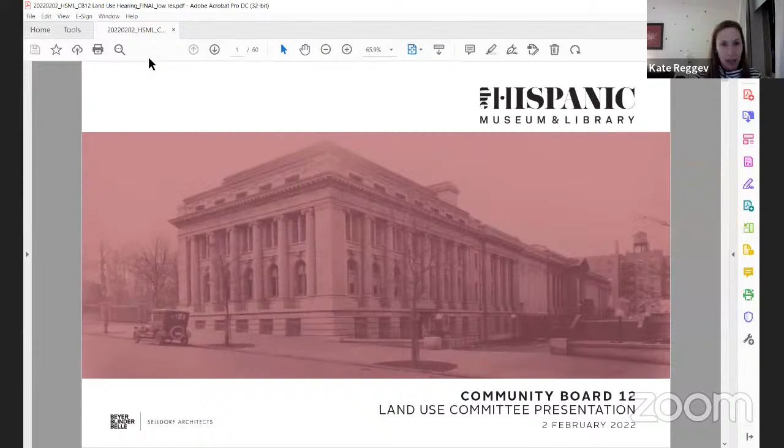And Kate, can we share the screen? Wayne? Yes, okay, tell me when. So Margaret, I'm sharing, just let me know. Can everyone see it? We can see it, okay. All right, and let me get into presentation mode, and there we go.

Excellent, okay, so we have a lot to cover this evening, but I just wanted to tell you that our focus tonight is to present our current plans for the Landmark Preservation Commission.

As many of you know, the Hispanic Society is located on Audubon Terrace, which is designated as a New York City landmark, and thus anything on the exterior of the building must be approved by landmarks. So we are coming to you this evening to present our plans in advance of presenting to landmarks, and that's why we're here.

But I just thought I would mention a few other things that are happening and what our objectives are. So as many of you know, this is the Audubon Terrace.

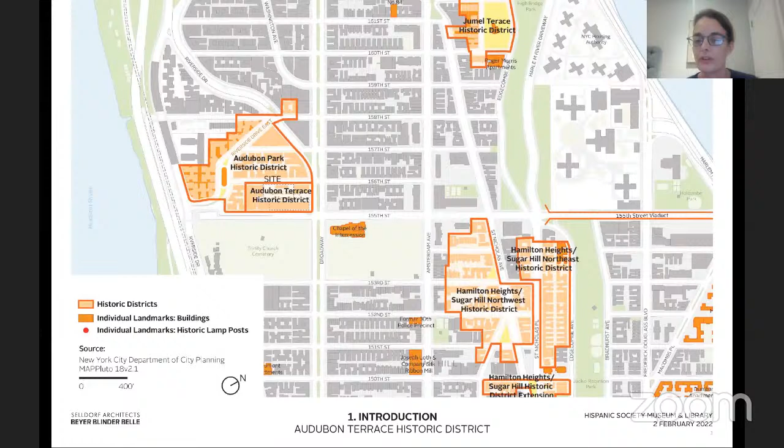This is the historic district. As you can see, there's the Audubon Park Historic District. The Hispanic Society is located on Audubon Terrace, on the south side on 155th and Broadway, and it also runs into the terrace, and we occupy the center building on the north side of Audubon Terrace. So just to orient everybody.

In previous meetings, I have presented early stages of our master plan, which we revisited with a new design team in 2018, completed in 2019. I'm really excited to be working on the execution of some of these plans. We are moving in phases, because we have a very ambitious project to address all of our buildings, the entire campus of the Hispanic Society.

You can see in this slide, outlined with this lovely red dotted line, the campus belonging to the Hispanic Society. So again, we're on Broadway and 155th Street, and on the north side is 156th Street. So that orients us all.

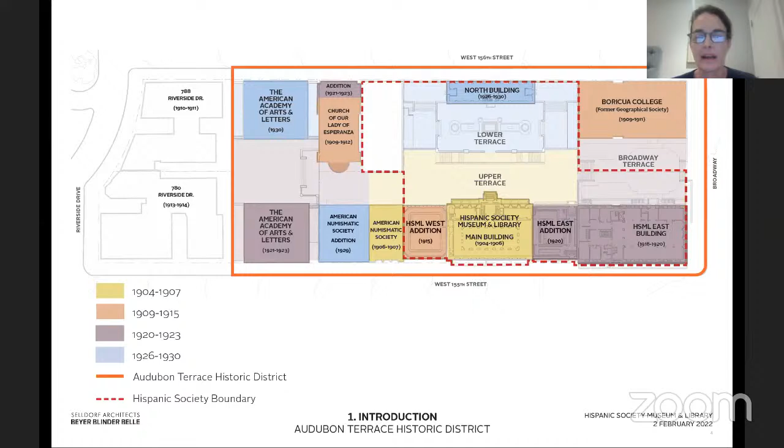Okay, and this is kind of a bird's eye view. There are two main objectives here that we're trying to achieve: one is having universal accessibility to our buildings, and also to reopen.

We have been closed since we redid and replaced the roof of the main building and restored the facades. We had hoped to be earlier in the stage of our renovation of the East Building, but we're getting to it.

What we did do last summer is a temporary renovation of the ground floor of the East Building so we could do exhibitions in that space.

But of course, that exhibition space is located in the East Building, and when we renovate that building, we will have to close it. So what we would like to do is reopen the main court and the Sorolla Gallery, and allow it to be fully accessible. So what we're really looking to show you today, and Kate's going to show it to you,

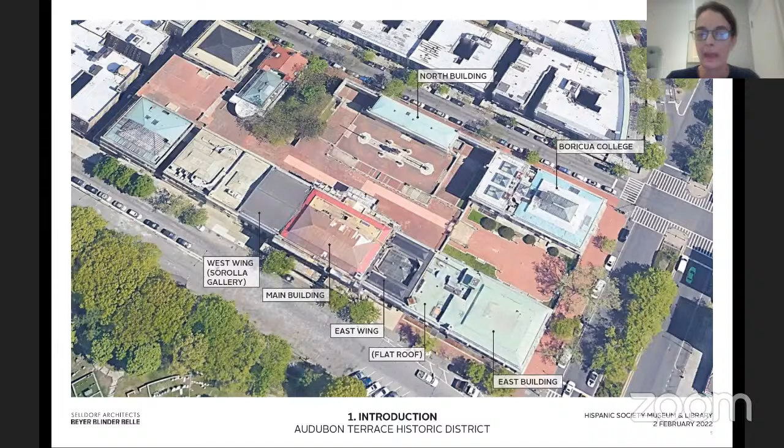is an accessible route. Some aspects are temporary until we can do the full renovation of the terrace, but we really are eager to open up the Sorolla Gallery and the main court and allow everybody to enter into that building. Let's see, what else do we have, Kate?

So this is, again, the terrace. Now, just a little bit of history for those of you who have not been to the Hispanic Society. The Hispanic Society's first building, the main building you see in yellow, was started in 1904, finished in 1906, and opened in 1908.

Huntington, our founder, had this idea of a cultural campus, bringing in other cultural institutions. He was also building the collection while expanding the building and finding space to put everything. So we actually purchased the building on the corner, identified as the East Building on 155th and Broadway, which was the former Museum of the American Indian building. We purchased that building in 1996 to expand our space, which also gives us direct access to Broadway.

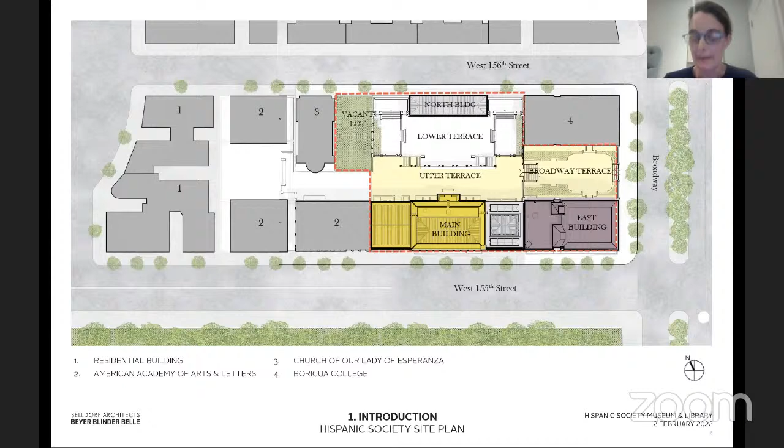Let's see, what am I missing? I think it's the next slide. But there are a series of terraces, which, as lovely as they are, are not accessible. So we are really eager to open them up and allow everyone to enjoy them.

So Kate is going to show you in a moment, but really that's the idea. The other project we're looking to address is the actual renovation of the East Building. We're working in phases, starting with the envelope, like we've always done with our projects. We're replacing the roof—you can see this old photograph from 1919 showing the original skylight, which was covered up by previous tenants. We're looking to bring that skylight back and create a glorious conservation studio on the 4th floor of the East Building, with a new copper roof.

As many of you know, there's no air conditioning in these buildings, so we're looking to fully air condition the spaces, in keeping with museum standards. That equipment has to go somewhere, so Kate is going to present the plan for where to put it—it will be located on the flat roof of the East Building, which she'll show you.

Another aspect of the plan is to put in a new freight elevator. It will be a service elevator—both a larger elevator for artwork and a passenger elevator, ADA accessible. So there will be a second elevator in addition to the one we have now.

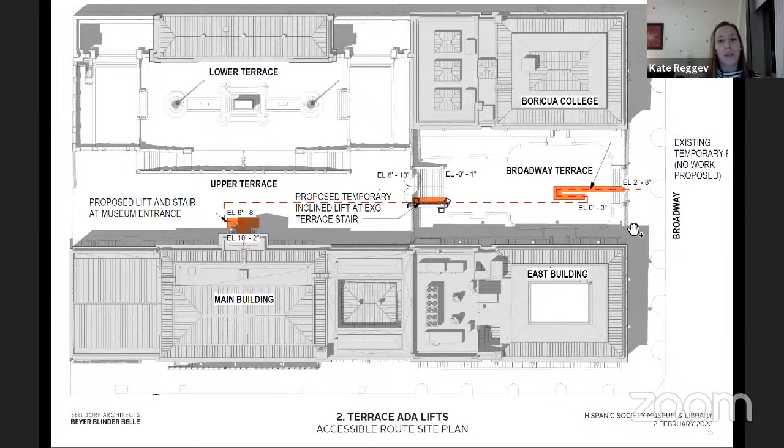So in section, we have Broadway over here. There's that temporary ramp, no work proposed. And then to move up these existing stairs, we're proposing what's called an incline platform lift. I'll show you more detail about that. And then finally, to get up to this last section here, to get into the main building, we're proposing building out a platform, a new set of temporary stairs, and then a vertical lift.

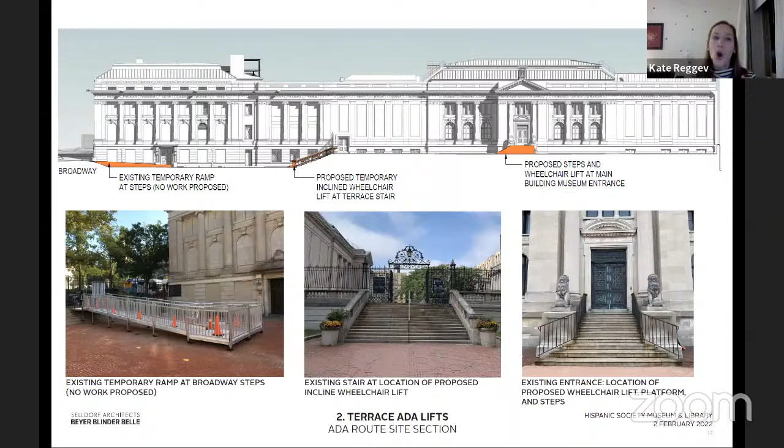Now, I'm saying all of this is temporary because we're not anticipating it will be there for just a month or two. We really are thinking temporary in terms of a 5 to 10 year timeline, so we want this space to continue to be accessible as the Hispanic Society continues work on its master plan and opening buildings over the next several years.

So looking first at this flight of stairs that go from the Broadway terrace to the upper terrace, a couple of notes about the existing conditions. The steps themselves are granite, solid granite, and then they're surrounded on either side by a limestone balustrade. And then at the top, we have a wrought iron fence and gate.

This gate is actually not original. We have some historic photos that pinpoint its installation to the 1950s.

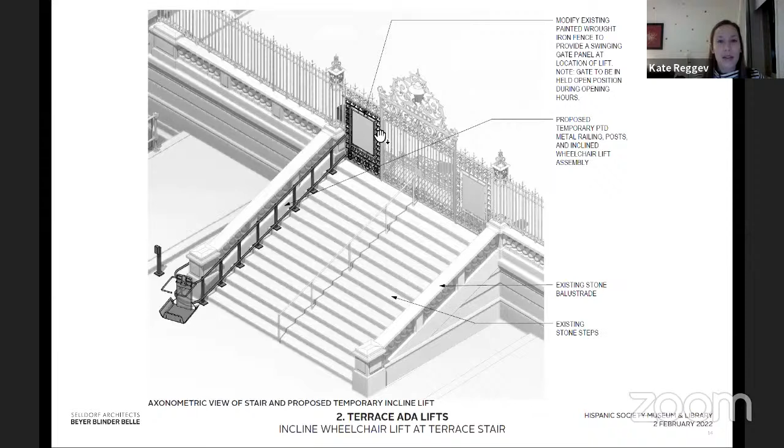And what we are proposing to do is install a platform lift that will take you from the bottom of the stairs up and then would open one of these wrought iron metal panels. The current configuration of the fence is that there's two swinging gates located in the center, and on either end are fixed panels.

Our proposal modifies one of the fixed panels so that it becomes almost like a swinging door that would manually open by whoever is also opening these gates when the museum is open, so that someone could roll onto a lift down here.

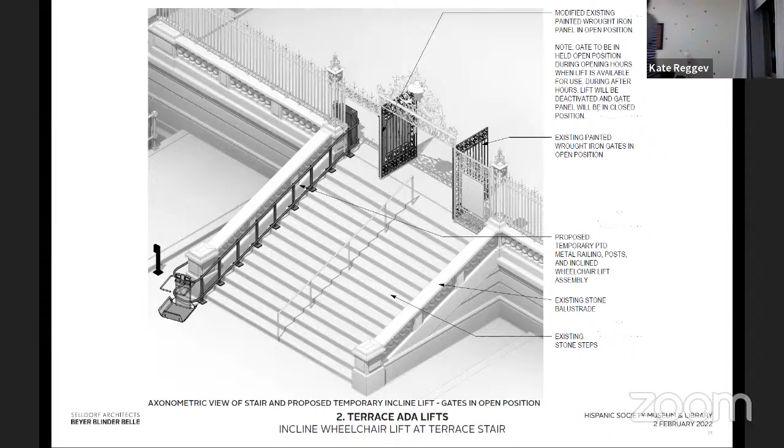So you roll onto the lift at the bottom, the lift moves you up the stairs, and then at the top you are able to roll off and the panel of the gate is held open. The call button is here at the bottom, and there's a similar freestanding call button at the top.

So this is the existing condition, and this is how we propose it would be. You can see the lift, when it's not being used, is tucked off to the left there. Actually when it's not in use, that platform is flipped up vertically.

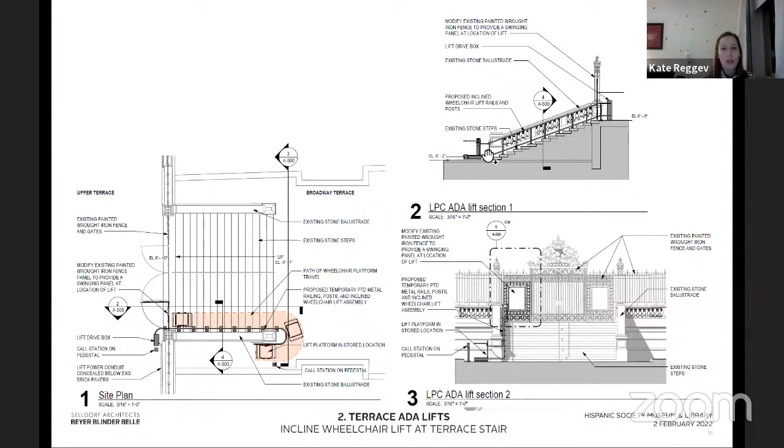So a little bit more detail, the path of travel is in the bottom left here. If you follow this red or orange path, you roll onto the lift, and then you are swung up and around and dropped off at the top. The lift itself is supported on every other step by these posts that go down onto the granite step, and then two horizontal rails.

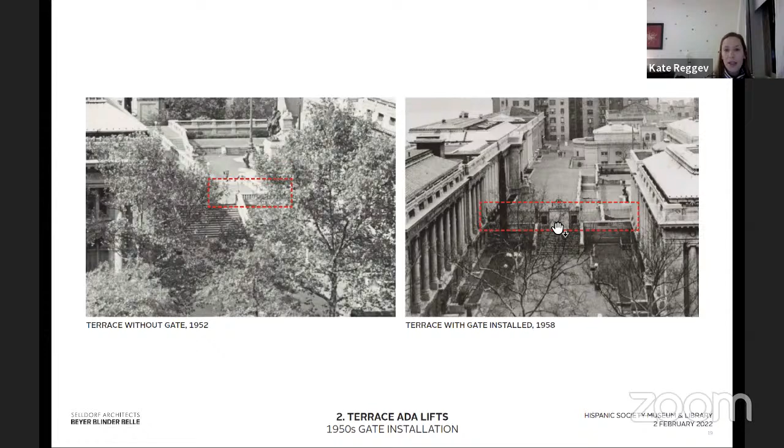This is just demonstrating that in 1952 that original gate was not there, so we know it's not original. And in 1958, we do see it in place. So the modifications to that non-original grille, we can talk more about the details of those.

In short, what we're anticipating doing is leaving this top panel so that there's continuity that remains at this location. And this fixed panel, part of it already is a separate panel. We do anticipate needing to add a horizontal member at the top and another vertical member on this left side so that it can transform into its own individually swinging gate.

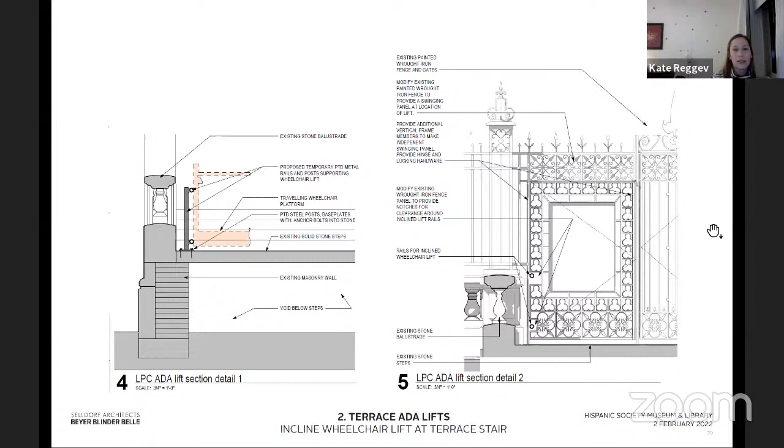Then from the top of this, where this lift would drop you off is what you see here on the left. Then you're at this what we call the upper terrace, and you are ready to move forward towards the main entry. But as we've mentioned earlier, the main entry itself has a flight of stairs that you need to go up in order to get inside.

Similar to the other steps, they're granite steps. They have a non-original wrought iron handrail, and then they lead you to the bronze doors here.

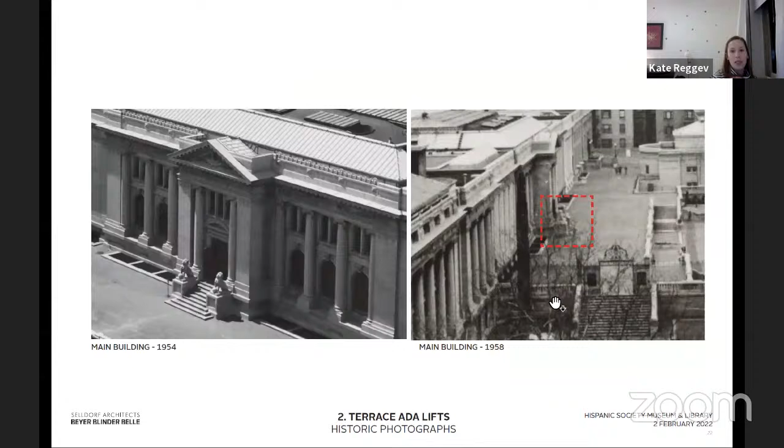One issue we have here is that there's virtually no stair landing at the top when you reach the top of the stairs. So in order to make this ADA accessible, we are proposing to create our own platform, extending out a new metal platform, and also having a new set of temporary stairs that take you from the level of the upper terrace up to the platform, which is at the same height as you enter the building.

And then on the other stair, we have an inclined platform lift. On this one, we have just a vertical lift. The rise here is shorter, about a 5 foot height difference, so this kind of vertical lift is actually pretty convenient for that.

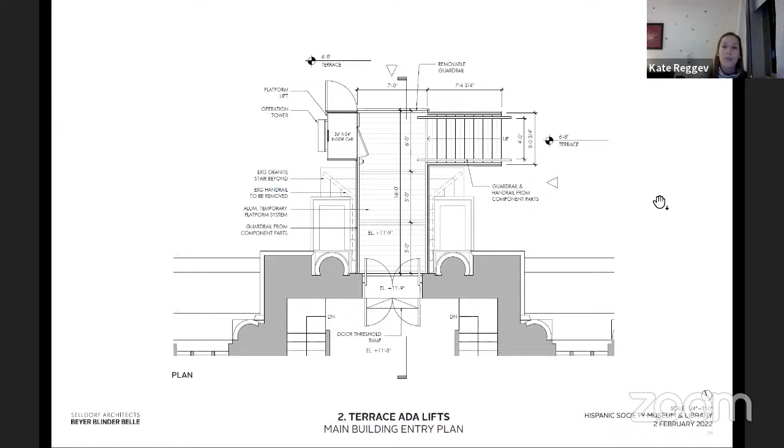What we plan on cladding the underside of the platform with would be painted metal aluminum panels. We are trying to pick up some of the colors and finishes that we see elsewhere in the building. There are some bronze doors here, and the windows are also bronze, so we want to continue that materiality here.

And so we would paint the whole thing, the panels and then the handrails and guardrail as well. All of that would be a dark powder coated painted aluminum.

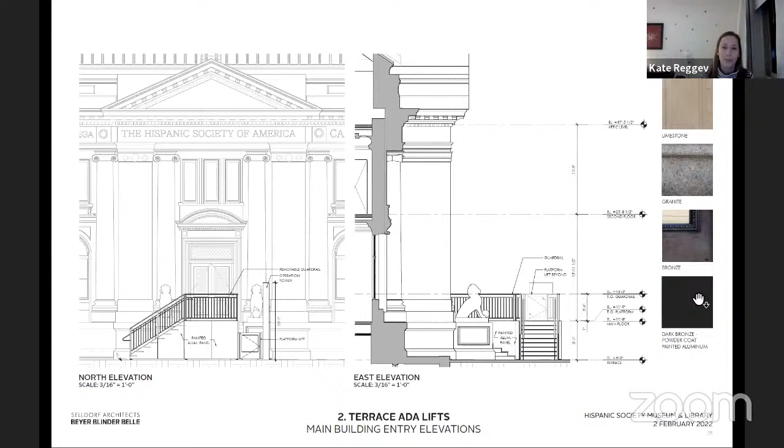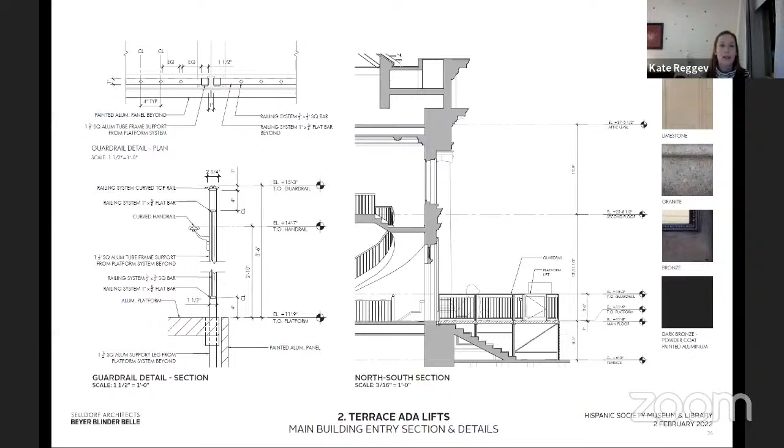A little bit of detail about some of the handrails: they also would all be ADA compliant. One quick note, one section of the railing would actually be removable so that the Hispanic Society can also use this as a means to transport art into the main building.

In sum, on the left is what we're looking at for that incline platform lift from the Broadway terrace to the upper terrace, and we think that would be black. It would have these freestanding call stations that I mentioned earlier, whereas the vertical lift would be a dark bronze powder coated aluminum, with a wall mounted call station right next to where you would enter.

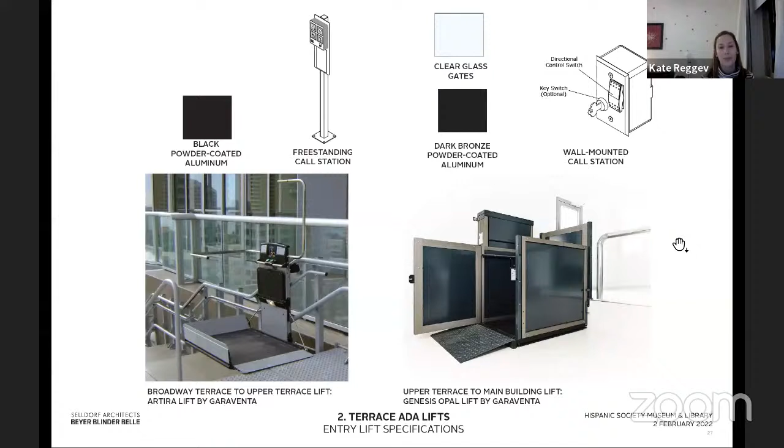So that's kind of addressing accessibility on the terrace. We also have a project where we're looking at the east building that Margaret had talked about earlier. We're trying to make that no longer primarily a storage space.

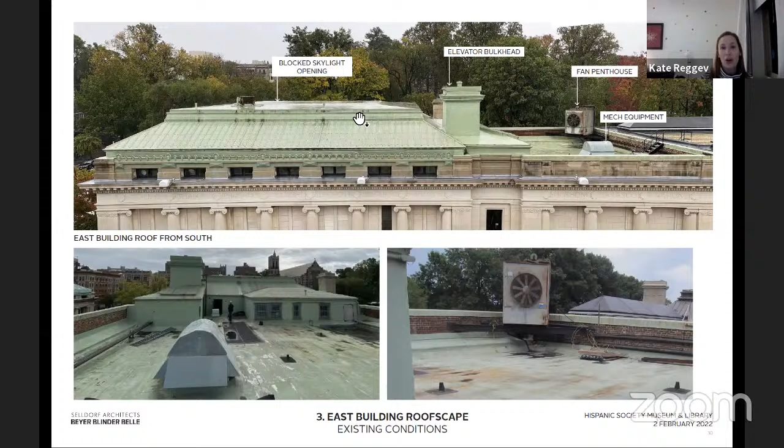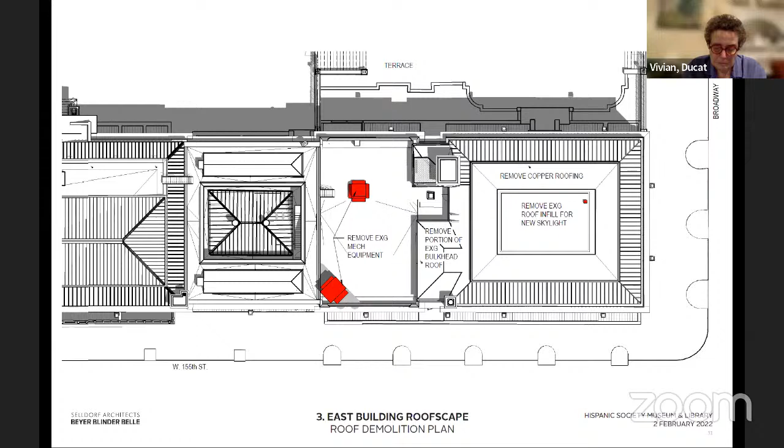A new elevator bulkhead. As Margaret mentioned, there is an existing elevator for the building, but it is sized for a passenger. It is not sized for someone in a wheelchair, and it also is too small for artwork. I should mention that elevator is original to 1919. So the building really needs an appropriately sized and accessible elevator.

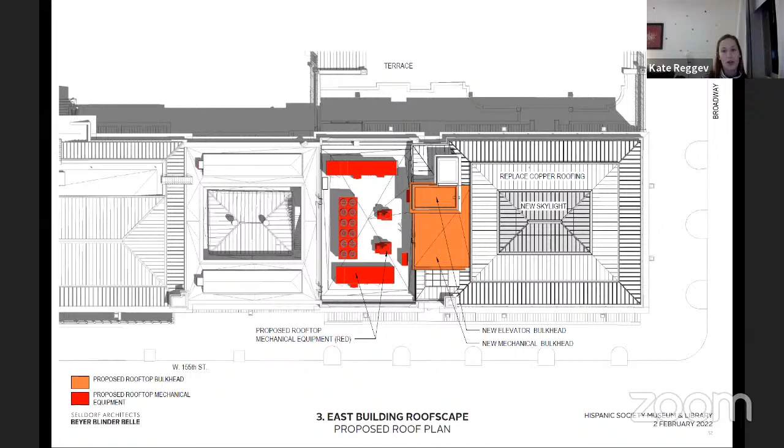And then to accommodate that, there's a low roof just south of it. That's also part of a new bulkhead.

Looking axonometrically at this building, kind of a bird's eye view, you can see these two existing pieces of equipment. The one on the south is really quite visible - it's really high up, quite large. And we are proposing to remove both of these.

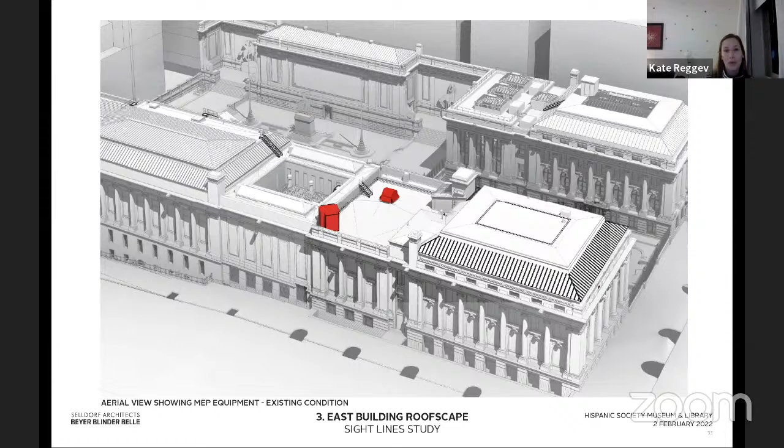Going back briefly to the elevator bulkhead and some of the materials: we are going to keep the existing elevator bulkhead. We will repaint it something more similar to its original color, which likely matched the existing limestone facade. We would continue that materiality and detailing for the new elevator bulkhead, which would match it in height, and also have a matching copper cornice around the entire bulkhead. Both would be painted stucco, and that stucco color would match the limestone.

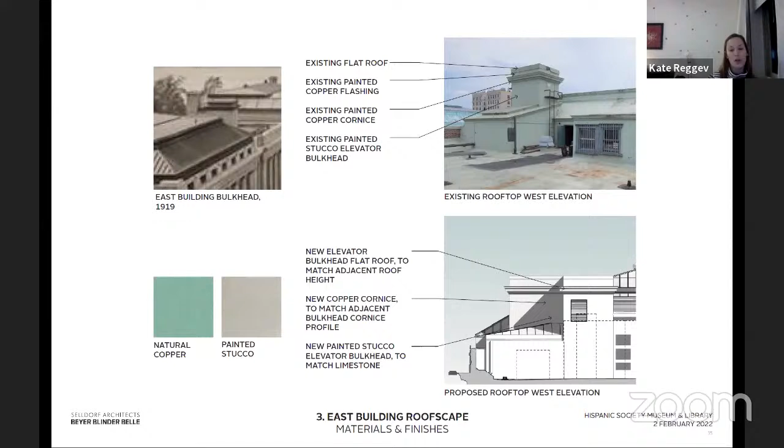We also are located on the north side of Trinity Cemetery, which has a lot of greenery and a slope, which means you really cannot see a lot of this equipment from far away.

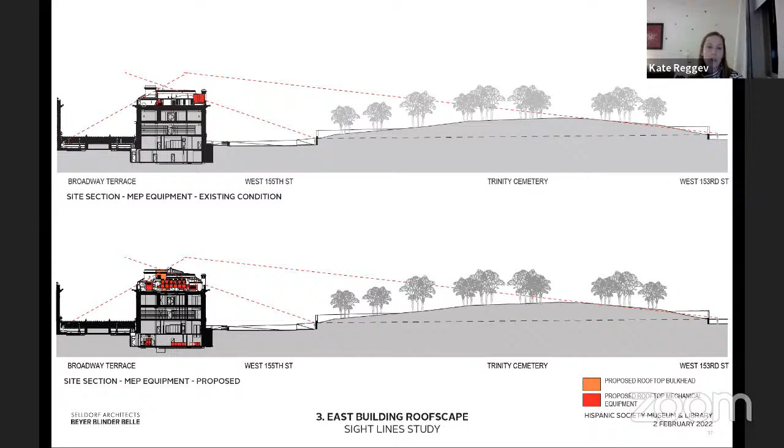So we will go through some sightline studies in just a second, looking at various vantage points from around the block.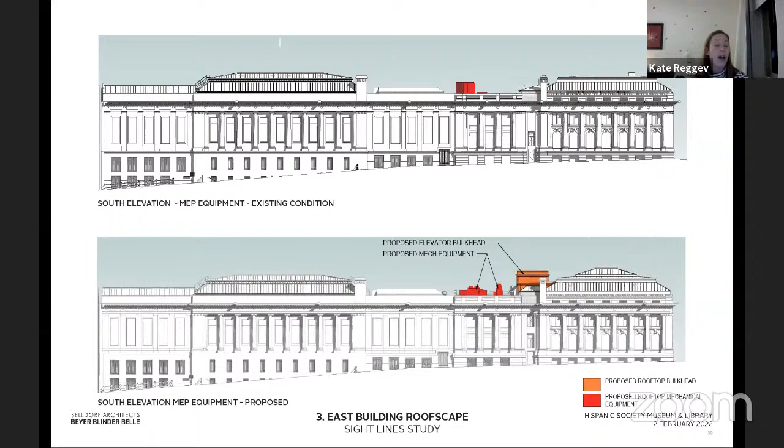Now I'm going to walk you through a couple of different photos and sightline studies. What you'll consistently see on the leftmost image is the existing condition. In the middle is the condition of a mock-up that we completed recently. And on the right is our rendering of what it would ultimately look like.

So this is if you are standing within the terrace, not technically within the public way, but still within the terrace - if you are all the way on the west side of Audubon Terrace, looking back at the east building.

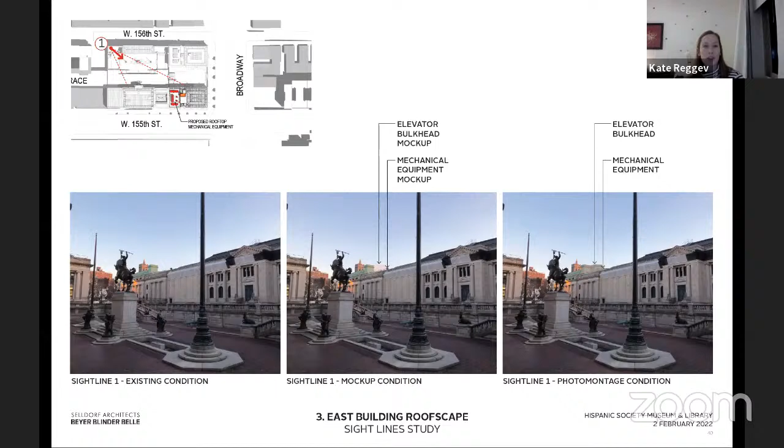In the center is the existing elevator bulkhead, and in orange you can see our proposed elevator mock-up. Just to the right of it, very low, is the mock-up for our mechanical equipment. On the right is our photo montage with the materials we would propose. That elevator bulkhead, again, is stucco, but it is the color of limestone, and it matches the existing elevator bulkhead. This would be the view if you are still within Audubon Terrace, but a little bit further to the west.

The mechanical equipment would be kind of a gray tone, but really for the most part, it's really quite hard to see. It's really low. This would be if you are standing at Broadway and the corner of 156th Street.

This is kind of catty corner from the Hispanic Society. On the left, the existing condition. In the middle, what you can see that little bit in orange is the mechanical equipment mock-up. On the right would be what you'd see from a distance, the photo montage. From this view, you cannot see the proposed elevator bulkhead.

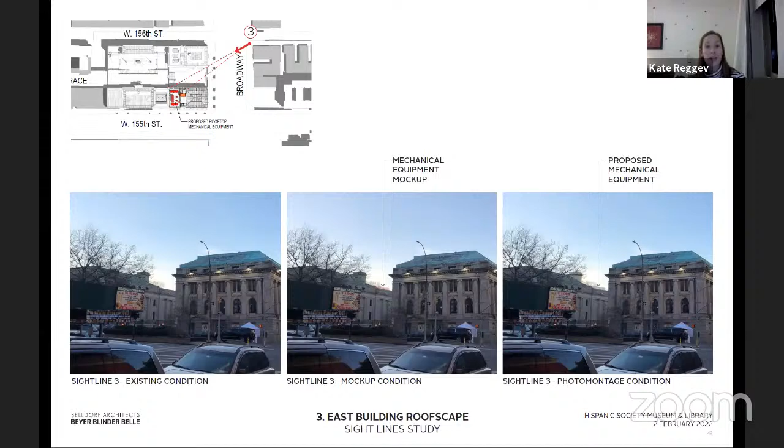Moving further south, if you're standing on the southeast corner of Broadway and 155th Street, you can see very clearly from a distance that existing mechanical equipment. From this view, you do not see the new elevator bulkhead or any of the mechanical equipment we're proposing. Neither the mock-ups or the bulkheads would be visible from this location.

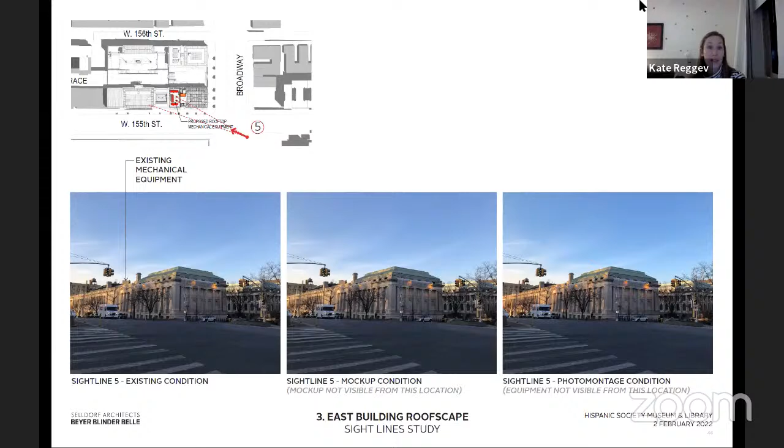Moving slightly further south, now you're mid-block on Broadway between 154th and 155th. You're far enough away that in the summertime the trees really block the majority of this, but in the wintertime you see a little sliver of the mechanical equipment, this tiny dot in orange. The mechanical equipment will be a gray metal finish.

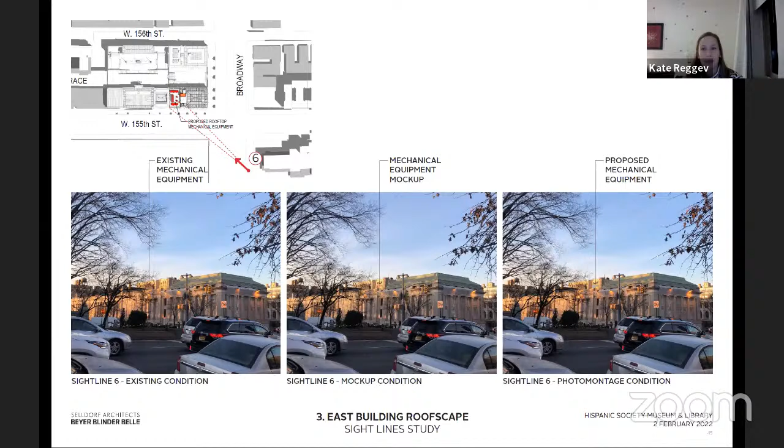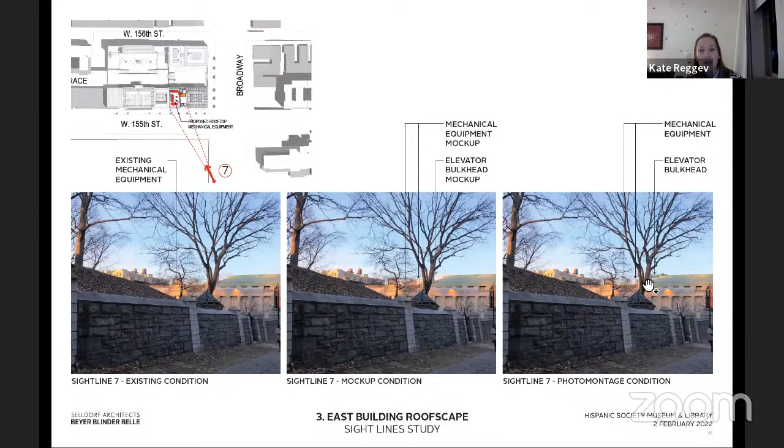If you're standing on the opposite side of the street, on the west side between 154th and 155th, you have the cemetery on your left. Through some of the trees, you are able to see ever so slightly this bit of orange for the mock-ups. On the right, you see a sliver of the new elevator bulkhead behind that tree, and a little bit of the mechanical equipment to the left of the tree.

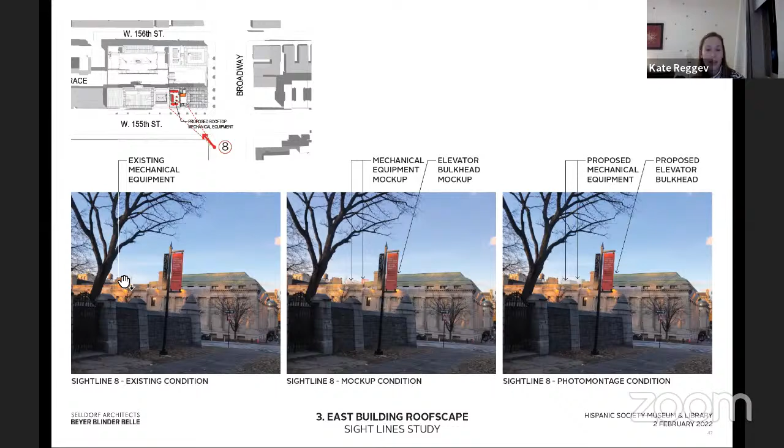Moving slightly closer, you do see again a little bit of the mechanical equipment and a sliver of the new elevator bulkhead. But I should note that in these locations, what's really dominant is the existing elevator and existing mechanical equipment. It's this kind of big chunky thing that you see in the left image.

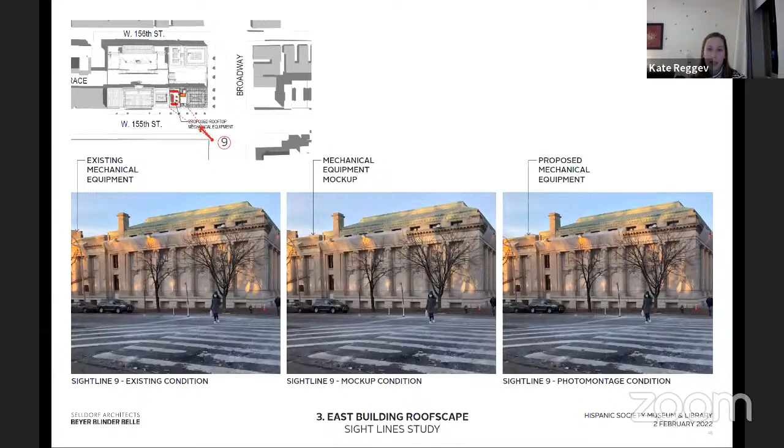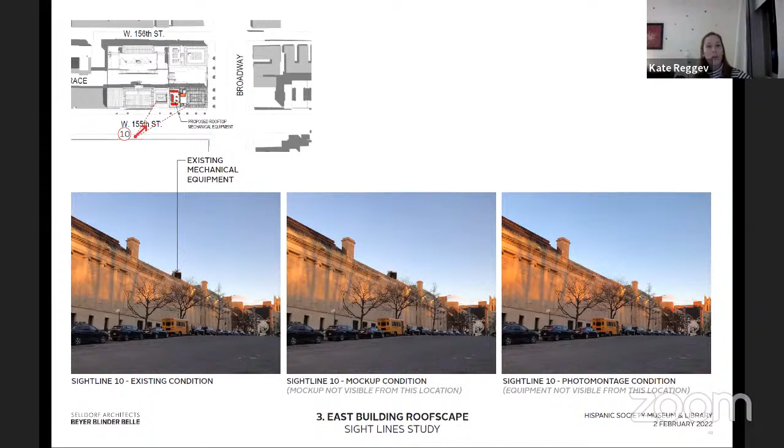Moving closer to the building, because of the elevation of the building, as you get closer you see less and less of the mechanical equipment and the mock-up, until finally you get to our last sightline study where you're further down the block and you do not see the mock-up or the equipment for the bulkhead or for the elevator. That's because at this point you're actually below, going downhill and looking up, so you don't see it.

Finally, as part of reopening and welcoming people back into the buildings and onto the terrace, we're looking at proposing some exterior signage. At the moment there really is very limited signage to the building—some existing banners attached to the fence on Broadway. We would like to do something more permanent that also has flexibility for changing out the banners when new exhibitions open.

On the south facade, we're proposing a single banner in this last bay. On the north elevation, we're proposing a symmetrical arrangement that emphasizes the building's existing symmetry—3 banners centered over the entry. On the east elevation, we are proposing a single banner in the southmost corner.

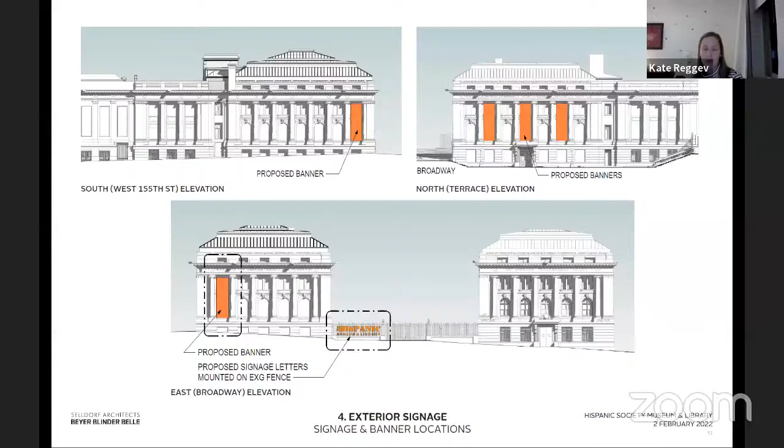And then on the fence itself, which I should note was installed in 2006, so it's not original and not historic, we are proposing to attach some kind of 3-dimensional signage. This would attach to the existing fence and would be a feature that's really visible and ready to be viewed by the public walking by—very pedestrian oriented.

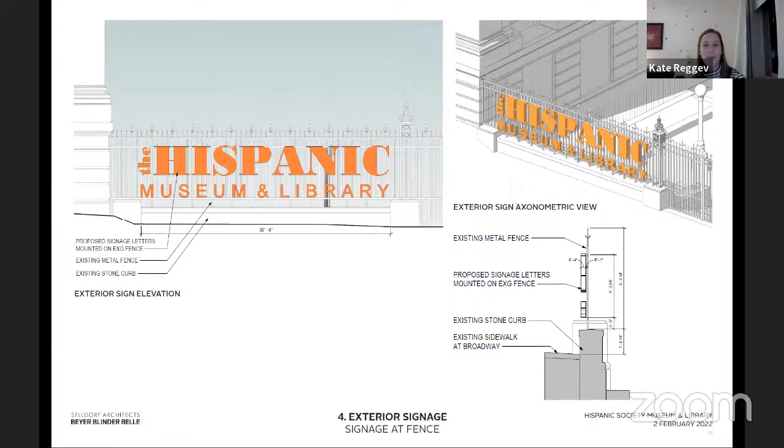In terms of how we would attach that, we took some inspiration from the Cooper Hewitt and how they attached their signage to their landmark fence. Rather than drilling into the fence, they bracketed onto it, so you really are touching that existing fence in the most minimal way possible.

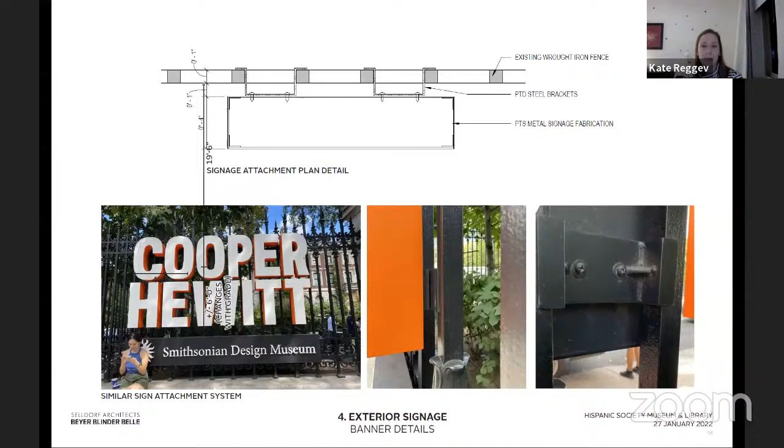For the banners, we are looking at a system similar to several other major museums in the city. It's almost like a rigging system that attaches at the bottom and top between these bays, and then this fabric banner is rigged up like a sail.

Thank you, Kate. I had two quick questions as you were doing the presentation. One is, do you plan or did you consider screening the HVAC equipment so that whatever is seen is a sort of intended designed element? And I noticed for the signage, you're referring to the Hispanic Museum and Library. Is there a conscious effort to rebrand the institution from the Hispanic Society of America to just the Hispanic Museum and Library?

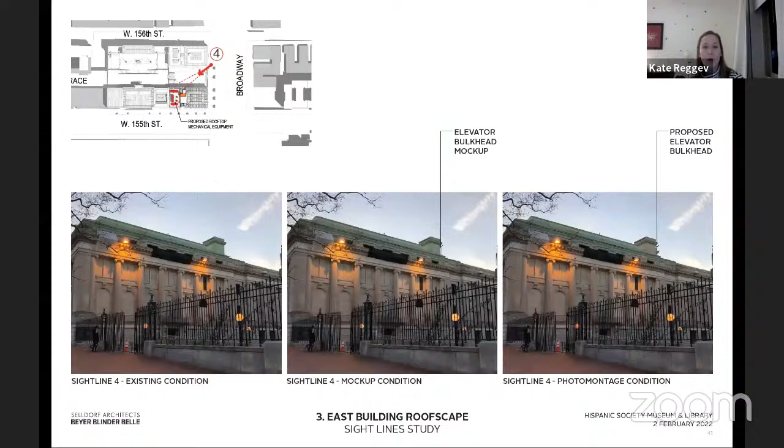Let me hop back and show you in section what we did. If we look here at the bottom, the mechanical equipment closest to the edge is the lowest equipment. And especially from the view from the south, that equipment is as low as we've made all of it possibly can be.

We're removing about 1.5 feet of fill at the roof, but because of the isolation and support required for this equipment, it really cannot be any lower. So if we were to install a screen, it would actually make it more visible than the equipment itself, just because of how low the equipment is.

And then Margaret, I'll let you discuss the name and logo. Thank you, Wayne, for that question, because it's a good one. We are and will always be the Hispanic Society of America, legally speaking, but because there's a misunderstanding of what we are as a museum and a library, we wanted to make that clear.

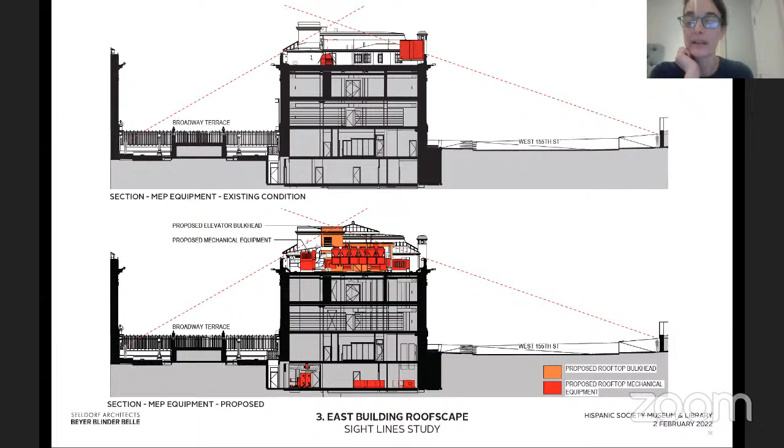So publicly on our website and our signage, we are the Hispanic Society Museum and Library. So it is a rebranding, similar to what the Morgan Library has done with their Morgan Library and Museum. So we are the Hispanic Society Museum and Library.

Really, the intent is that 'society,' I think for many people, sounds like a private club, which we are not. We're working hard to be more engaged with the wider community and be known as a museum and library. We're open, free to the public, and we want to invite people in. So we are the Hispanic Society, but we are a museum and library. That's the intent behind that.

And that happened several years ago. It's just that we don't have a sign, so no one knows. But if you go to our website, it's Hispanic Society Museum and Library.

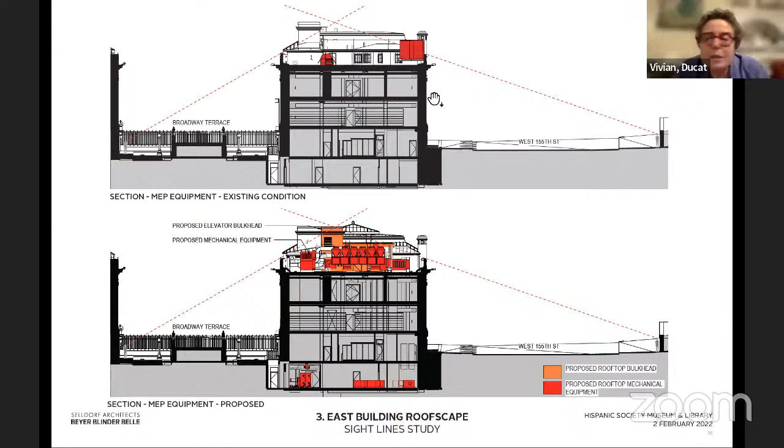Yes, thanks. Vivian, your hand is up. I was curious whether you've already started the work, because as in the picture I emailed you, Margaret, there's already sort of an orange structure. There's stuff going on the roof that I can see at my window.

Yeah, so part of the application process with landmarks is that they require you to do a mock-up of what it will look like, so that we could take these pictures for you and show you what it's going to look like. So it's for you and for landmarks, and also to photograph and document.

Of course, I have to say, just before we installed this, right before a storm, we've been concerned with some of the netting. I think we took it down because we didn't want it to hurt anyone, but it's been reinstalled. So it's not work, it's really a mock-up so that you could look at it and comment on what it will look like installed.

I don't know, Kate, if you want to speak to that. Yes, that's exactly what it is. You might also see that there's some netting around some of the elements of the cornice around the building, and that's related to ongoing maintenance and repair work that my firm is working on. We will be coordinating that with landmarks once work is being done. Right now, we're in the investigation phase of that.

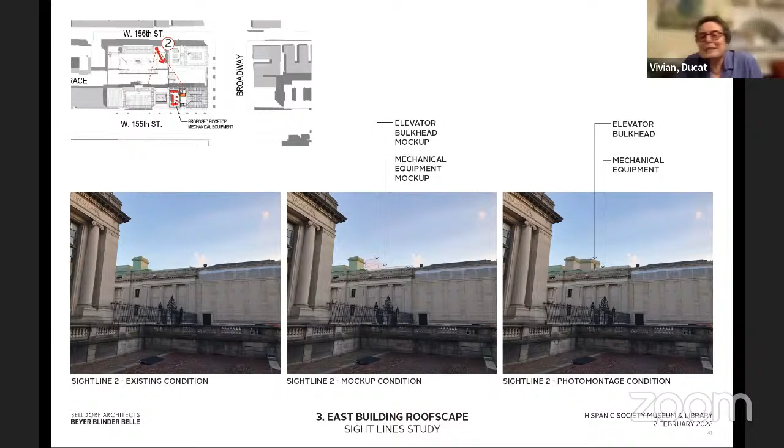I have to say, for the record, the Museum of the American Indian did not leave in 1960, it left in 1994. It was said earlier that it was in the 60s, but I actually think it was later, because when I started in 1993, they were still open. So it's even later than 1960. The Smithsonian had taken over the building and it did have some kind of air conditioning system, but it was probably installed in the 60s or 50s. It was very old, and that's what that one unit on the roof accommodated. But thank you, Vivian, for that.

Tanya, any thoughts on this? No, thank you.

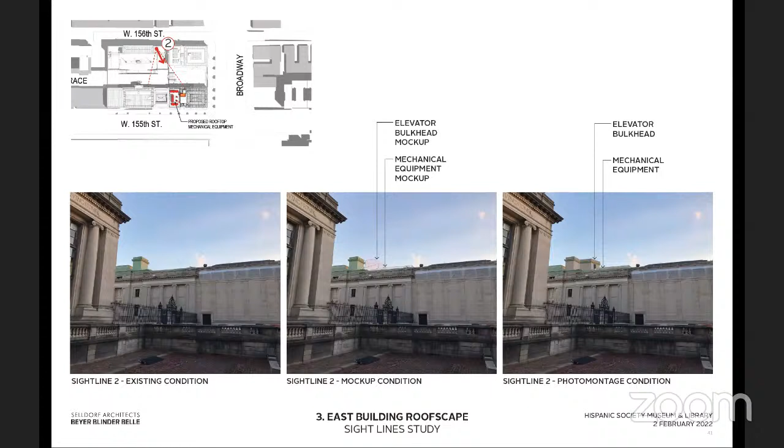Okay, so since it was clarified that a resolution is requested, would someone like to move a resolution? Yeah, I'll do that. I second it. Well, what do you move, Steve? I move that we support the proposed project, including the modifications on the roof, as well as the banners and signage, and that we recommend that the Landmarks Preservation Commission approve the proposal as well.

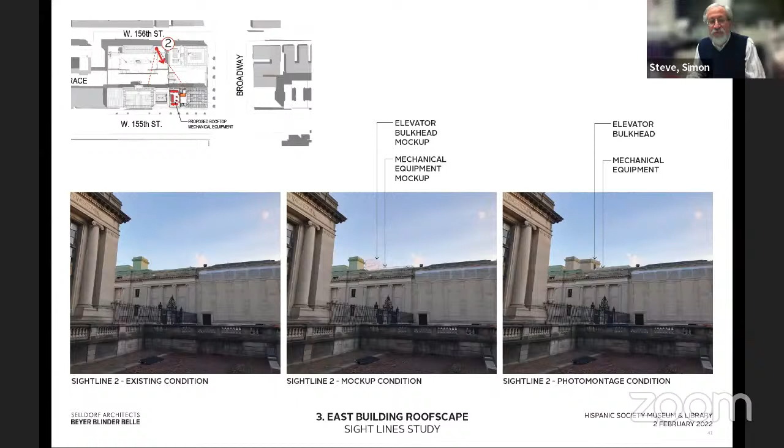That's what I was seconding. Yes, so it's moved by Steve, seconded by Jim. Is there any further discussion?

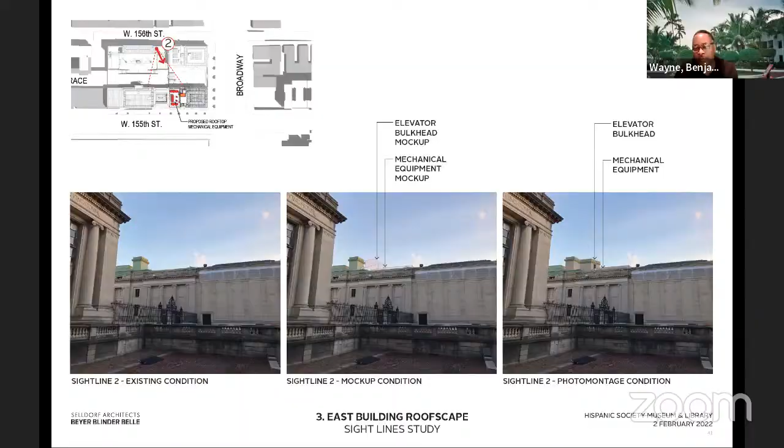In that case, I will take a vote. I will first take votes from the committee members. I do not see any other board members present. So after I take votes of committee members, then members of the public who are present can also vote. Unlike in a general meeting where only board members vote, at committee meetings, members of the public can also vote. So first, for committee, those in favor, say aye or raise your hand. Aye. Aye. That's 1, 2, 3, 4, 5. Any opposed or abstaining?

Now I'm going to take votes from members of the public who would like to vote. You can raise your hand in the system. So members of the public who would like to vote in favor? I see 4 hands, 5 hands. Any members of the public opposed? So the people who voted yes, take your hands down please. Any opposed? Any abstaining?